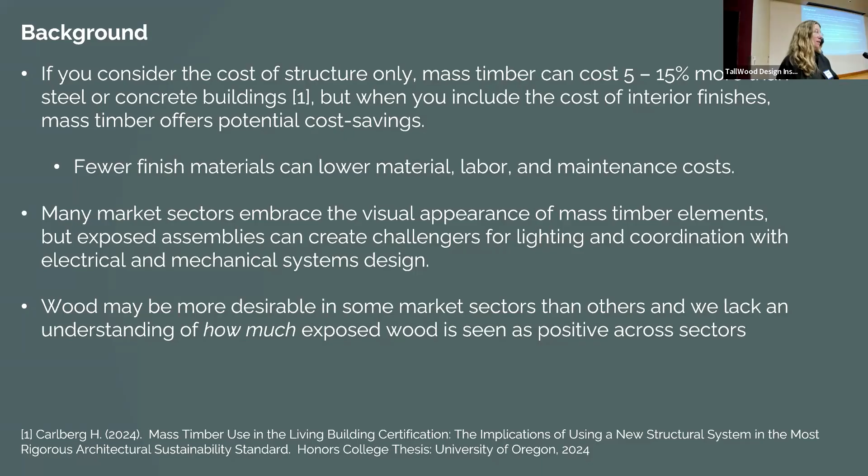Many market sectors, as we are all aware in this room, embrace the visual appearance of mass timber elements, but exposed assemblies can create challenges for lighting integration and coordination with electrical and mechanical systems design. And wood may be desirable in some market sectors more than others. We lack an understanding between space use types of how much exposed wood might be seen as positive between different sectors.

And so while wood provides a biophilic appearance, it also results in lower surface reflectance, which can reduce daylight penetration as well as indirect bounces from electric lighting systems that can make it harder to achieve certain sustainability and wellness ratings. Concrete and steel structures are often encased in painted drywall and have higher surface reflectances from white paints. And so we're often getting lower surface reflectances from exposed mass timber surfaces.

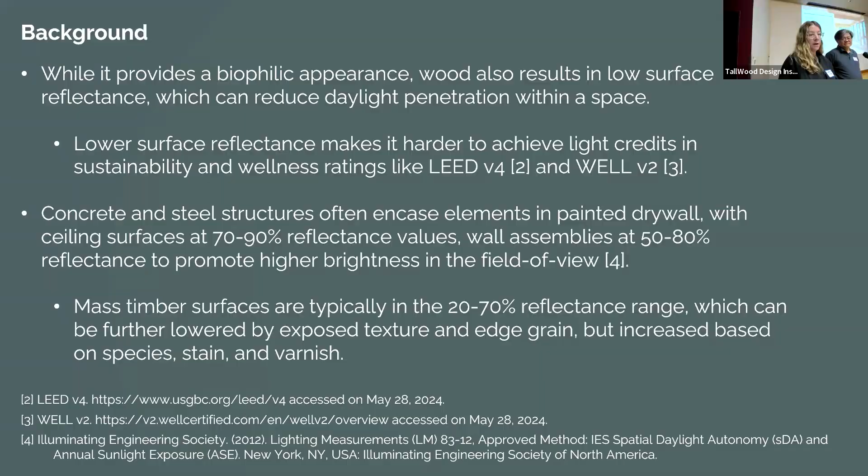So there are also some human factor considerations for design in mass timber. Obvious opportunities are the biophilic associations. We also have a very warm finish color that can help shift the appearance of cooler, more energy efficient light sources like LEDs. And there are fewer secondary structural elements, which can lead to higher floor to ceiling and higher window placements on the facade. Also, surfaces naturally absorb moisture and have some antimicrobial properties.

But it is difficult to hide electrical, fire suppression, and mechanical components. And so those are often either exposed on the ceiling, or we have to introduce secondary drop ceiling elements, which then would cover up the parts that we're trying to expose. And that warm color can contrast daylight, and it can also shift warmer lighting sources to begin with. And we also have heard a lot about acoustics, which we'll mention in some of the interviews that we've been doing.

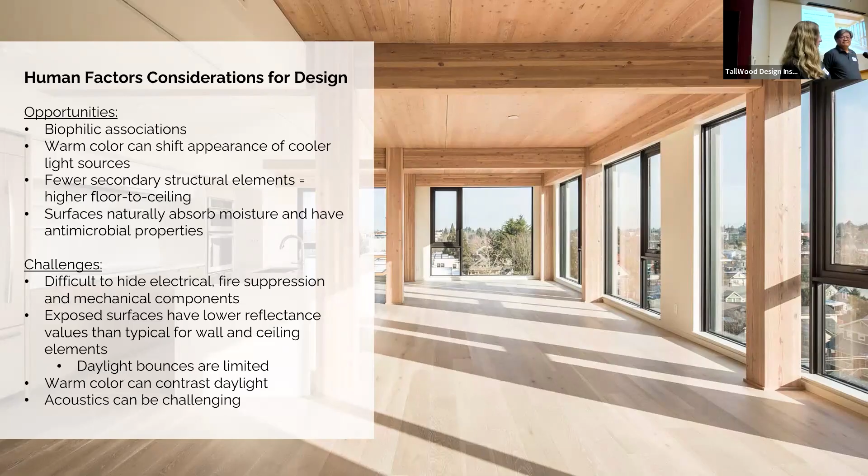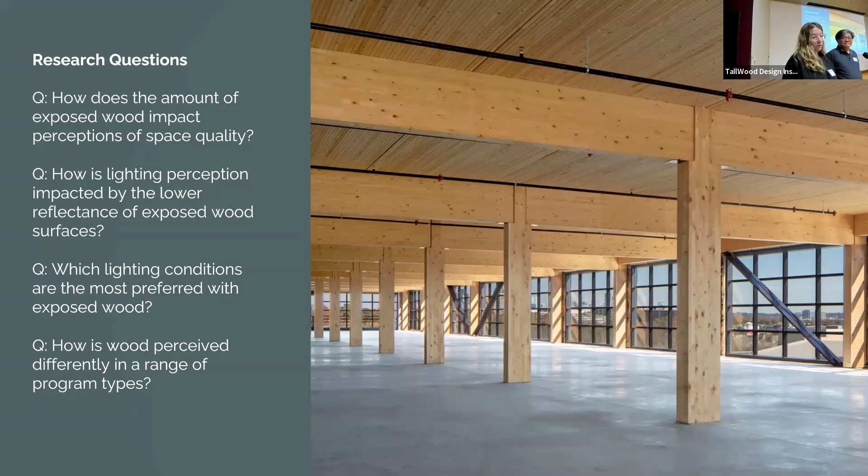So our research questions are really, how does the amount of exposed wood impact perception of space quality, specifically between different space use types? How is lighting perception impacted by these lower reflectances of the exposed wood surfaces? And which lighting conditions are the most preferred when we do expose wood on the ceilings and walls? And the last one we'll continue to talk about.

So our project is outlined. We started with some interviews with designers and engineers that are working on mass timber projects, trying to understand the decision process in the selection of material finishes and issues of coordination, especially between electrical lighting and fire suppression systems. We did an experiment using virtual reality, which we're going to show a bit today, to collect subjective feedback and compare spaces with different interior finishes on the ceiling, floors, and walls. And we're not going to go as much into the simulation phase, but we're also looking at how varying quantities of wood impacts lighting performance.

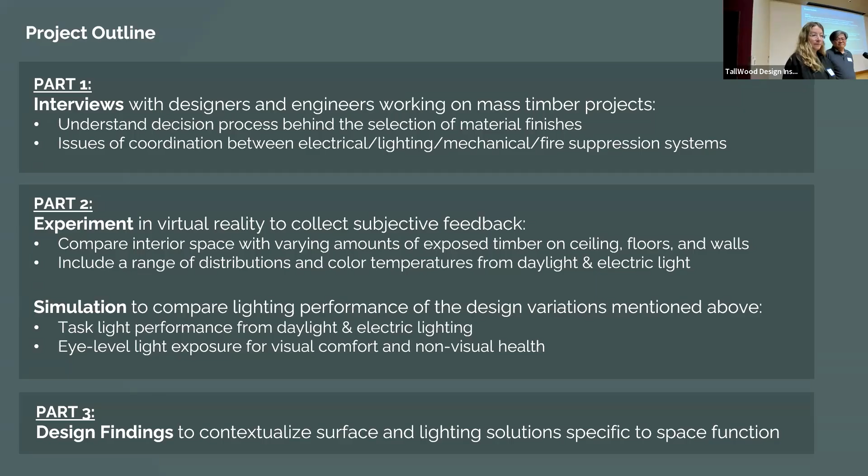So we spent a lot more time than originally intended trying to simulate photometrically accurate wood grain. This is a niche in the lighting field which you could just keep sinking into. When we typically simulate lighting environments in the virtual space, we can apply a material texture and surface reflectance qualities, but mass timber has a lot of variation when you start to introduce wood grain, as well as natural variation that occurs in the board.

So this is an image on the right of our research associate, Alan Mahich, who had to develop this randomization process of assigning wood grain and then dipping into not different species, but the color variation that we get within the species, so that we can then create these detailed visual environments to use in our experiments.

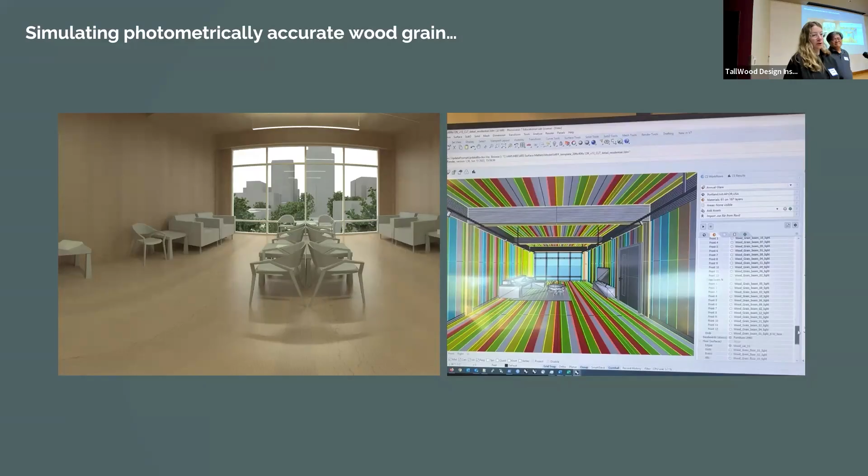We also did interviews. So I mentioned we have 7 participants in here now. We have 3 more scheduled, and these come from a range of different firm sizes and professional titles. But some key issues that have come out of this is really like acoustics is a common issue mentioned by designers, that they often have to integrate things like baffles to deal with that.

Lighting is also mentioned as a common challenge. So people saying they avoid indirect lighting because of that lower surface reflectance and that sort of loss they get, as well as the sort of color shift of the wood. And also people talk about cost, but I think people are interested in arguments that could help them sell this across just the cost of the structure, so including finishes.

There's definitely an interest in integrated solutions for lighting, but there's some concern about how to transport things if we start to embed systems into panels and then we're transporting them and they have, let's say, more fragile components, that there might be losses associated with that. But that is going to dovetail into our next project, which Kyuho and I are going to be working with Corey Olson on.

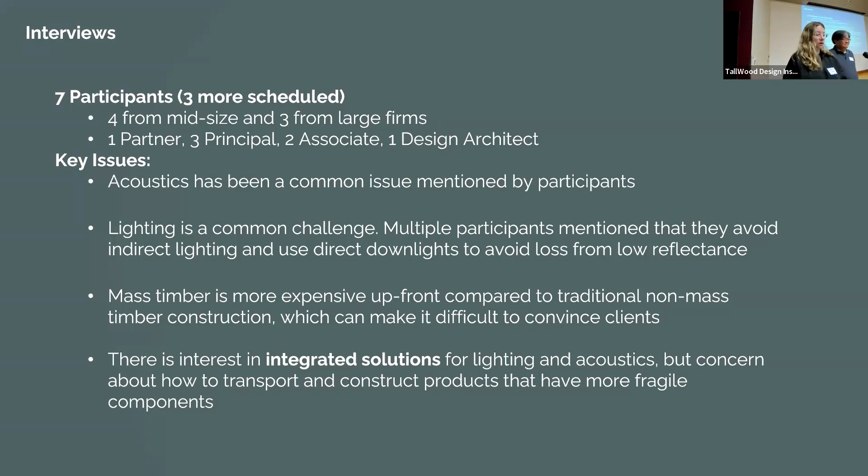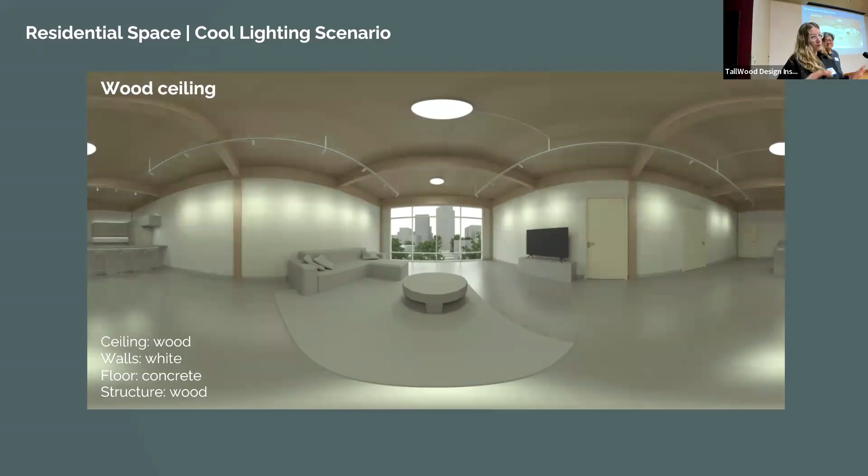And then we have an all wood scenario, which is structure, walls, ceiling, and floor is all mass timber. We had a white encased drywall ceiling with a concrete floor, exposed wood walls and structure. And then we also had the kind of opposite where the white walls were encased in drywall and the ceiling was exposed mass timber with a concrete floor. And we were doing these scenarios to try to ask the same kind of questions and see how much wood starts to shift certain perceptions.

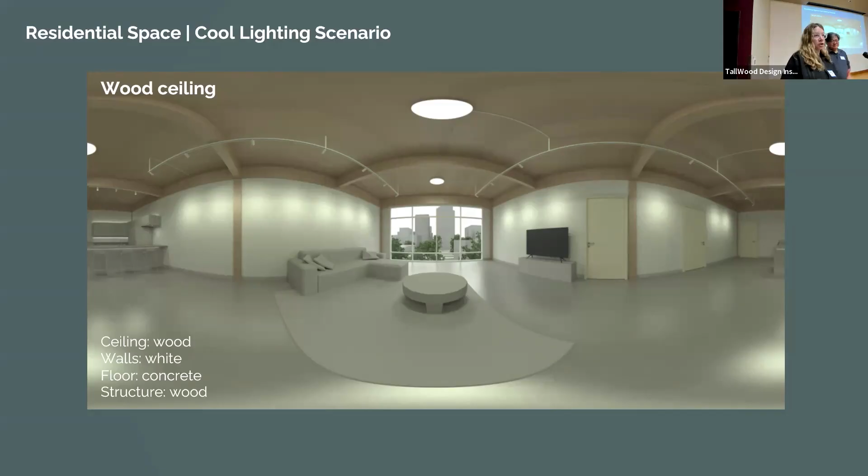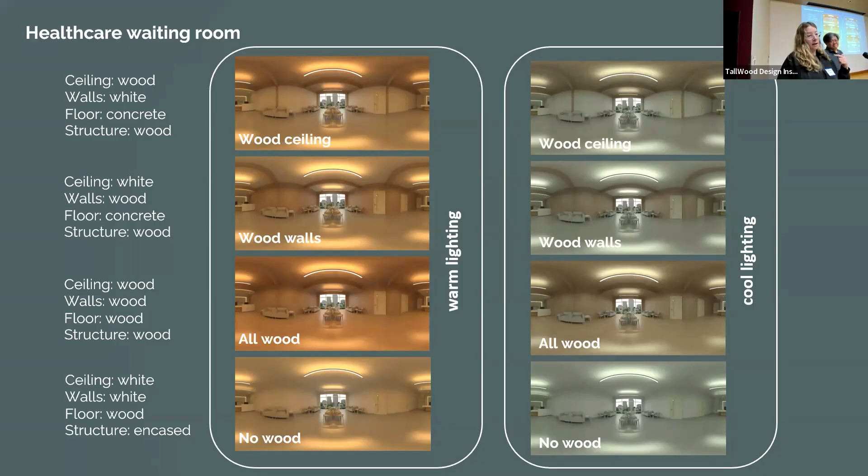We also looked at a kind of warm lighting scenario across all of these, so we can compare the effect of color temperature. We've also done a healthcare waiting room. So people in our experiment get placed into one of 3 groups. They either see a residential space, a healthcare waiting room, or an office environment. They do not know there are different groups. You get randomly placed in this, and then you are answering the same kinds of questions in each of these spaces.

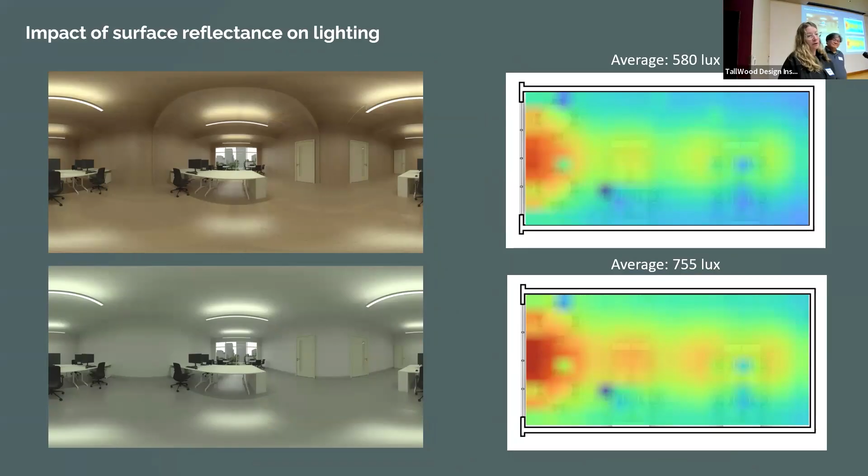And on the side, we've also been looking at the actual quantitative impact of these different finishes on the overall lighting quantity. So you can see comparison of when everything is white painted, you're getting much higher average lux levels than when you have everything in wood. This is just a quick snapshot of us popping through the scenes on the computer. You would see them as fully immersive wrap scenes in the virtual headset.

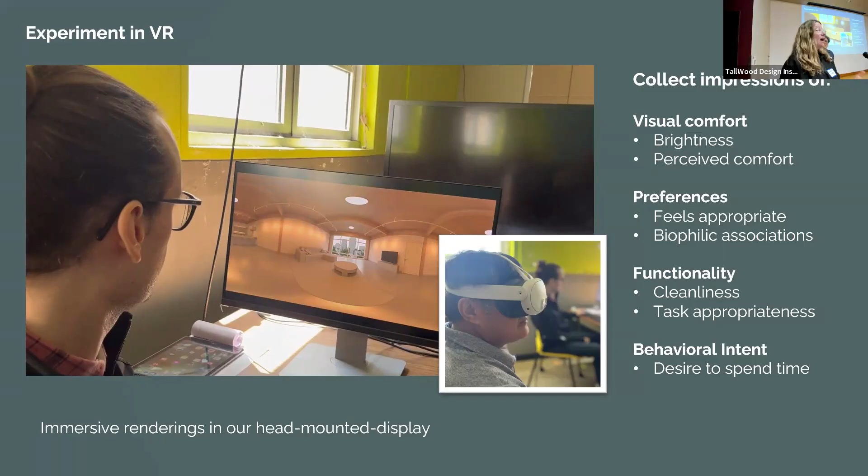And when people are in there, we're asking them questions about brightness perception, perceived comfort, whether or not it feels appropriate for the space use type, if it feels natural, how clean it feels, how hygienic, is it appropriate for the space? Would you want to spend time here? If you were stuck here for a while, how would you feel about it? Things like that. And Kyuho is going to talk through some of the initial findings, but I will preface this is ongoing. So this is a real small sample size. We're about a third enrolled on the data, so we'll have more coming on this.

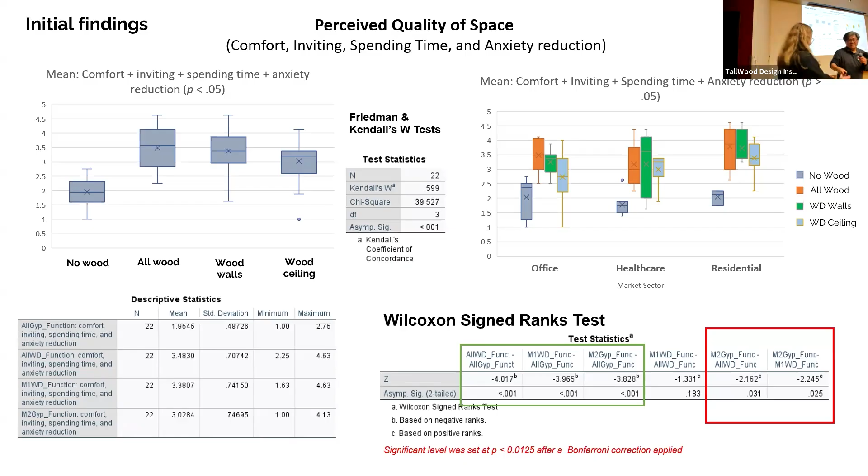I think you have to advance on here. Yeah.

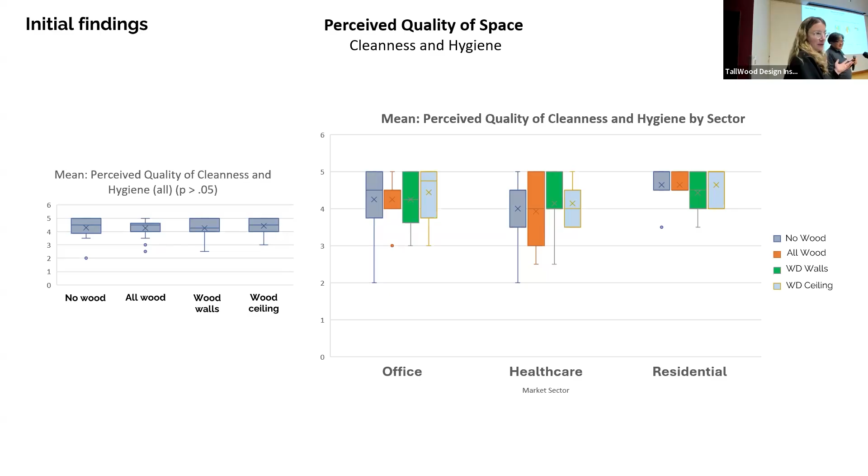So we're very curious about what's really happening in terms of the surface quality and the perceived hygiene. And contrary to anecdotal things that we've heard, people actually do see the wood as being cleaner than the white, which was not what we were expecting to see. So again, we'll expect to see this more significant as we add in. Right.

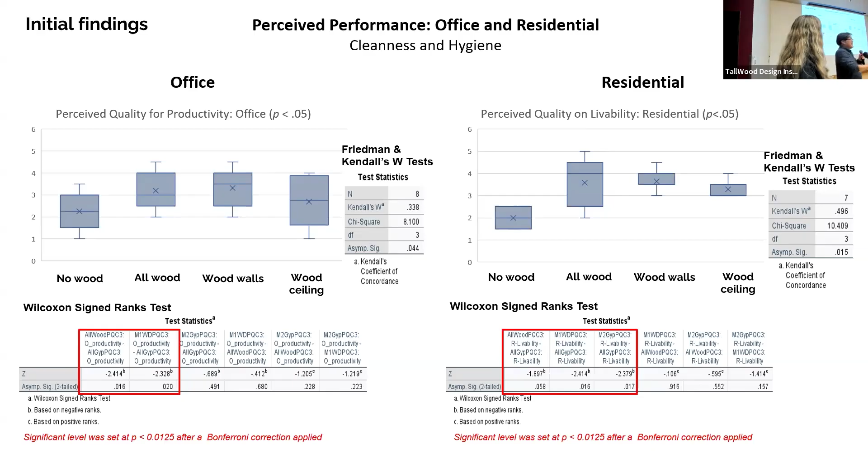So in office, we talk about the perceived productivity in that environment based on different surface types. You can see the mass timber finishes have a better performance here. Although in this case it looks significant, it actually is not significant because of the small number. When the Bonferroni corrections are applied, no significance level is achieved. But with better data collected, I think we may see clearer patterns here.

And then we can see the previous one. I think we're probably behind time.

Yeah, so the residential one is kind of similar. We're looking at more data into it. And the next one is the healthcare part. So what is the perceived quality of care? Now we have a little data here, but at this time we don't have any significant differences among different kinds of finishes. So we're looking at more data.

Right, but we do think as the sample increases, we're going to see this trend we've seen across, which is that any amount of wood is outperforming no wood. But there are some opportunities here, especially if we can get some of the same biophilic characteristics or perceptions while still having some amount of drywall, which gives opportunity for us to hide different systems in some surfaces but still have exposed wood.

So one of the other things that we discovered is between all wood versus the mixed one with the wood wall portions. Those two data sets have a very interesting dynamic. We see very varied responses about the surfaces with the wood wall. So we're looking at the data for the future.

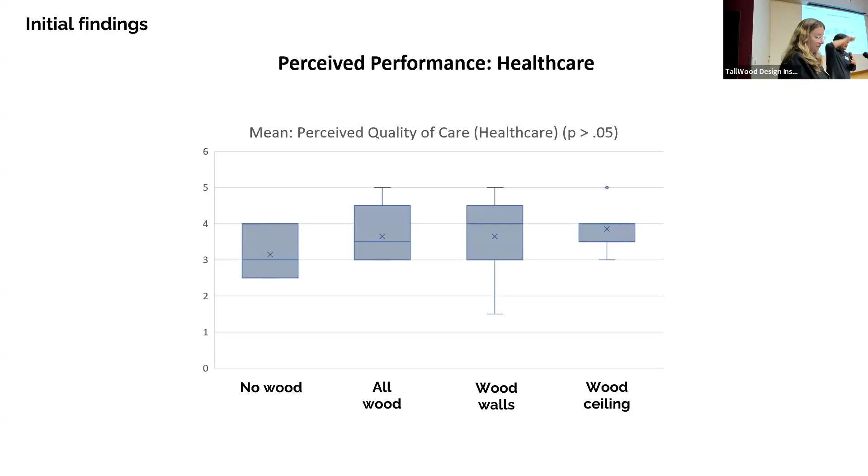And then just last, real quick, because I think we're over time. We are continuing to run this experiment. We're going to analyze it between space use types, and also look at the effect of lighting color, which we've not been able to do yet. And then we are starting a new grant, which builds off a lot of the feedback we've gotten in the interviews, which is going to look at integrated systems in panelized solutions, embedding lighting and acoustic treatments.

We will be doing that together with Kyuho and Corey, and also building off of a design studio that Kyuho will be leading in the winter with undergraduate and graduate design students. The students will explore possibilities of interior system assemblages related to the mass plywood panel system.